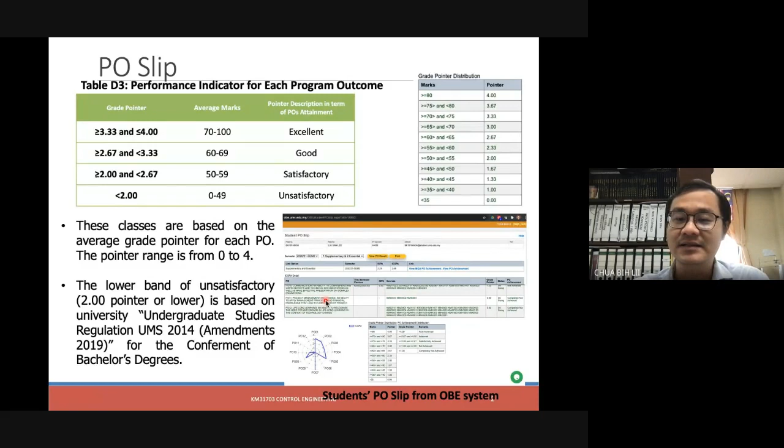Yes, Doctor. All right. Clear, Doctor.

So I think that will end the first part of the needs of the BEM, the EAC, the accreditation process, and why you need to undergo all these things.

These interview sessions, for those selected by the panel, are very important to attend, because they select based on certain criteria. They may choose people from different backgrounds, maybe your entry is from Asasi, Matrix, and so on. So they may want to see what is your entry requirement.

And whether it matches what we put in our handbook or not. If we say for diploma it must be 3.0 and above, so they just interview you and double check. If a student says their diploma is only 2.5 but got admitted, it means something is wrong with the system. So they just want to cross check that what we present to them matches. That's why they interview students, the staff, and everyone along the process.

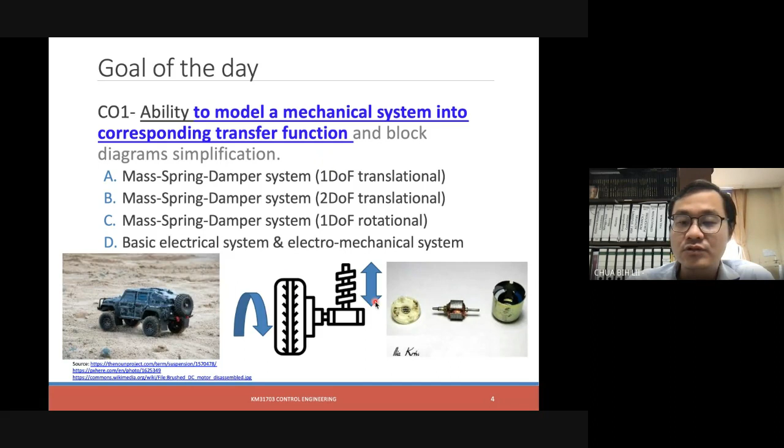So it involves translational and rotationals, right? As you know, we always say modeling. This modeling word can be very wide. I guess from the first years in your study, you have the course called CAD, where you learn how to draw a model inside a software, maybe SolidWorks or any other CAD software. So we call that a model.

That model can be a virtual model. In these courses, what we intend to model is a mathematical model, mathematical equations that represent the effect of that particular system.

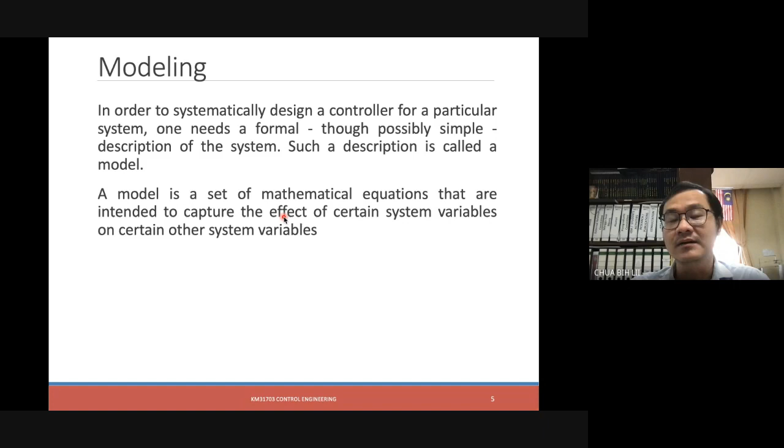That's another kind of modeling. This is what we expect in terms of modeling in control. We try to see a physical model or physical system, and then we try to capture its response, how it will behave, into mathematical equations. We call that a model. Based on that mathematical equations, then from there we can further analyze it, whether the system is stable, not stable, and so on.

I guess later on you will also learn in mechanical vibrations about resonance. You've heard these terms in physics in SPM. So resonance - what is resonance, and how we actually see resonance in so-called mathematical form. From there we try to avoid all this problem so that the system will not become unstable. This is our purpose, of converting the physical model into a mathematical model.

In many cases, we are dealing with non-linear models. However, as an engineer, we always try to simplify. Even though it's non-linear, we try to linearize it, so that the system becomes easier to solve. So our purpose is very direct.

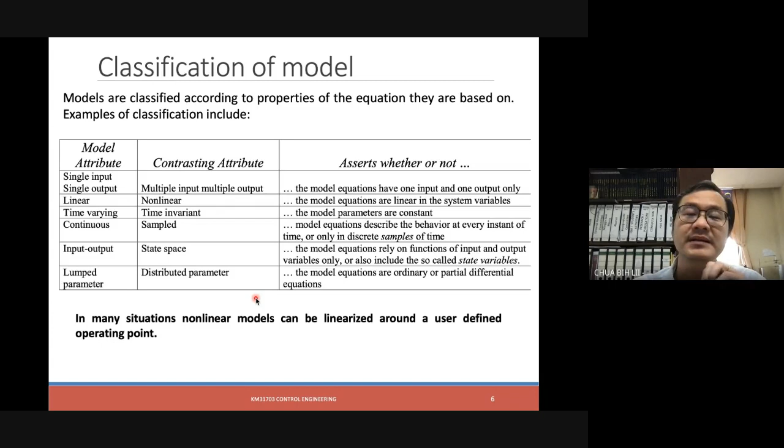As an engineer, we try to see a problem - it can be a very big, complex problem - and we try to simplify it, by breaking it down into smaller parts, into a range of user-defined range. So here is your task as an engineer: to find the balance between the simplicity and the accuracy.

If it is a very complex problem and you just simplify it as simple as possible, then you may lose certain accuracy. So you have to find the balance between them, whether the accuracy is more important or it can be acceptable at a certain level. If you further simplify and the accuracy drops drastically too far away from the real situation, then it may not be suitable.

Actually, if you recall, the formula Newton's second law, F equals to ma, is a simplified version of a mathematical model. The more accurate one, you have to deal with Einstein's equations, gravitational equations, which involve the relativity of two different masses and so on. So that's where the simplicity of F equals to ma is well accepted, in the defined environment, working very well near the surface of the earth.

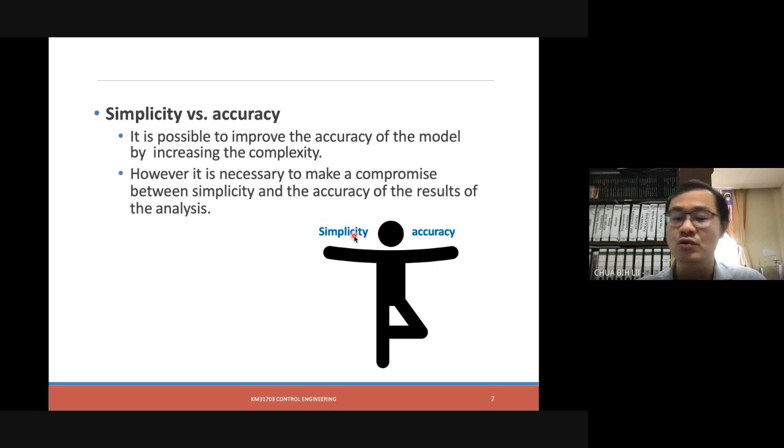Okay, so that it becomes not so-called homogeneous, right? Okay, so this is a general definition in mathematics, right? So I guess this one is not really important for you now, okay?

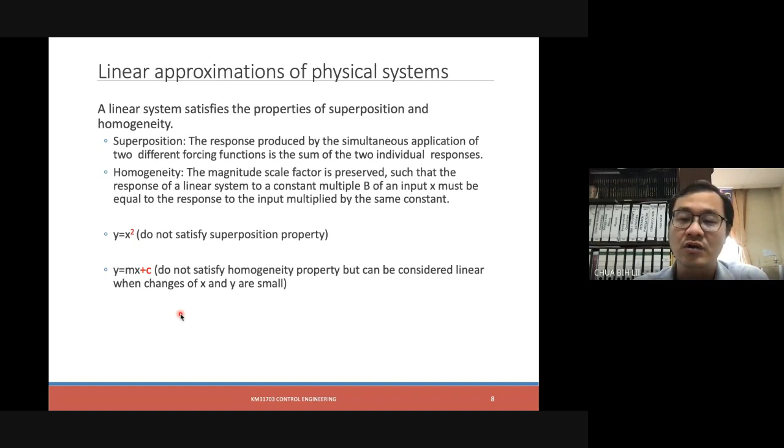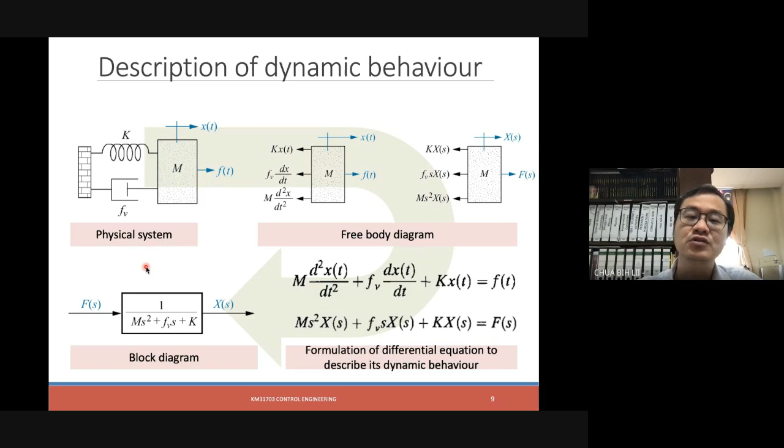So you may have one simplified physical system, or more than that, maybe 10 of them, and how they interact between them, so you can just draw an overall block diagram later on to interconnect them, the effect of all these interconnections, and see what is the response when you put in this input and what would be the expected outcome of the system, right? So this is the idea behind it. It looks very complex, but the fundamentals are very straightforward. All right, so this is our purpose, the exposure or the fundamentals of these courses.

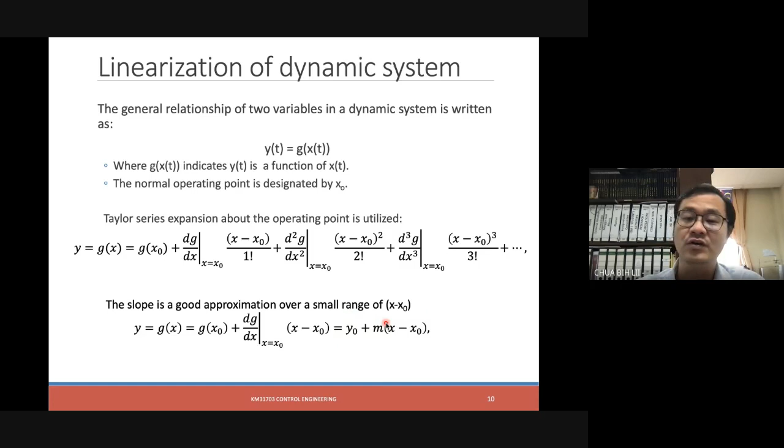So if you see a g and maybe an x over here, right? You eventually form something like this. It's just y equals y naught plus mx, right? So this is a linear equation form, and this is a very good approximation for a small range of x. Okay, so this is how we linearize it.

In other words, in graphical form, you may see that this is the oscillation response, right? It keeps oscillating, but to linearize it, we look at a certain range only. If you define this particular working region, if you only want to know the response of theta within this small range, not more than 90 degrees, let's say 30 degrees to minus 30 degrees, it is very well defined, just like a straight line.

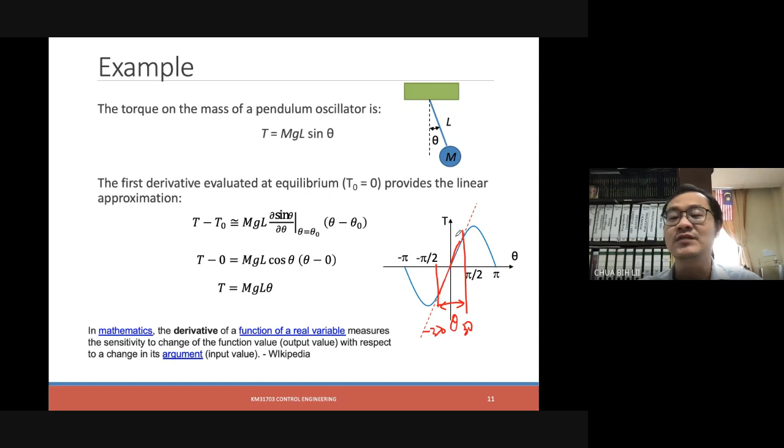Okay, this is how we linearize the system. Instead of a sinusoidal complex response, we linearize it with a straight line. This is the idea behind it, right?

So here is an example captured from the textbook by Nise, I guess. So what you need, you can download it from the mathematical background slides from the Google Classroom, all right? So you just go through it. It's just a refresher of a technique used in differential equations: how to transform it using the Laplace transform.

So you can see that differential equations, you can actually solve them into this, so that you know what y is with respect to time. And how we are going to solve this is through the Laplace transform, one of the methods. I know in differential equations you may learn different methods as well, the so-called conventional methods, which do not use the Laplace transform. But in control engineering, we rely a lot on Laplace transform methods.

So therefore, it is recommended for you to just quickly go through how they turn it into Laplace terms in order to solve it. Just changing the domain from time, because your equation is all about a variable with respect to time, into the Laplace domain, which is the s, the so-called imaginary domain. Once you change into that domain, you can solve it using the Laplace transform formulations, and eventually reconvert back from the s domain into the t domain. That is the idea behind the Laplace transform. Just quickly go through it on your own.

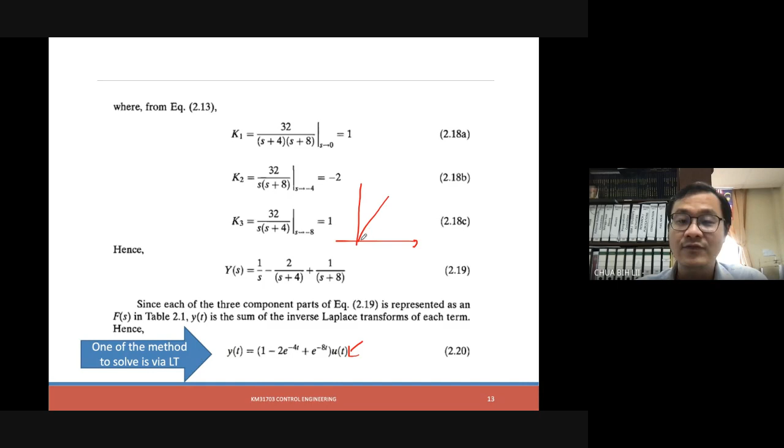But you can see there is a function over here, u(t). Instead of directly multiplying by time, you have a function u(t), such that it is not directly but indirectly related to time, so that y at 1 second refers to 1 second, 2 seconds refers to 2 seconds. Why would we define it this way? Because you have to visualize that this input in real life may not be a straight line; it can be in a form like this.

So at time 1 second, u(t) may be 1; at time 2 seconds, u(t) can be 2, coincidentally; but at time 3 seconds, u(t) may be 4. So it is not directly proportional to time. They are time dependent but not directly a function of time. That is what it means. I hope you get that idea. So in the control system, as we know, we form it in terms of output and input.

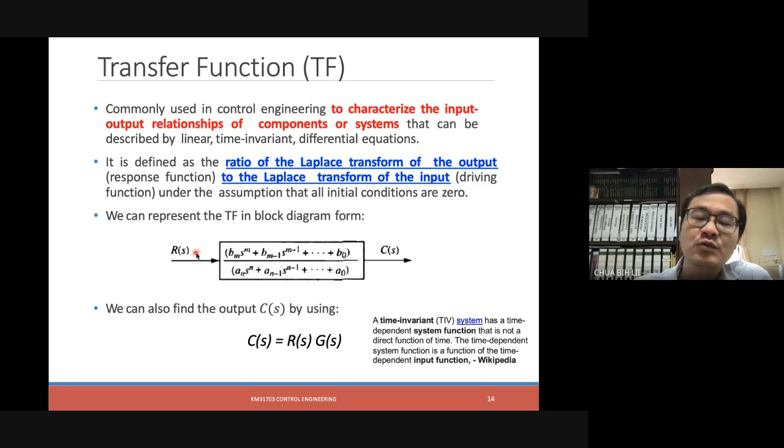In order for us to analyze them, we will start to do some testing later on. All this testing, we would use a conventional or very standard test waveform. So it can be in the form of impulse, we just put a signal of it, impulse, or step, meaning to say it will change and forever be there. One step test input, or ramp, it will continue to change, and parabola and sinusoidal form of input. Why or how are they related with the mechanical system?

Again, if you recall back the spring mass system of a car, or a wheel, let's say a wheel, so you have a spring and a wheel. So eventually, if you form this into a block diagram, or transfer functions, what would happen if this car is driving, and then they come into a pothole? So meaning to say this car now, a pothole like this. So the car will move, and then go down and up.

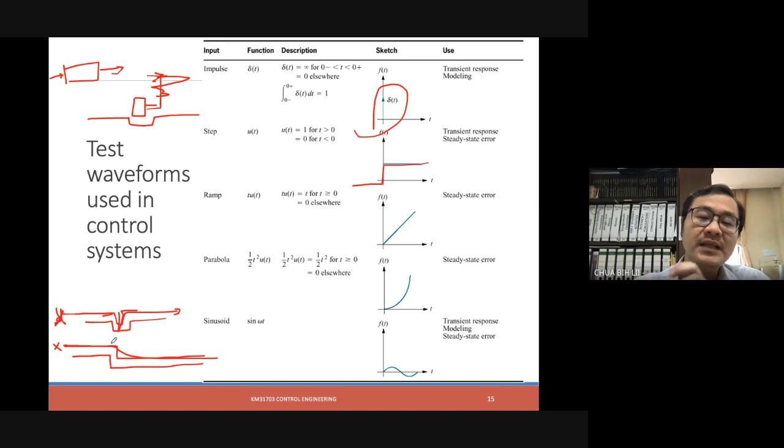So the changes of displacement can be in the form of x. So this form of changes can be represented by the impulse, because it's just one point, change and go back. Then another type of form, related to step, is that if the road is suddenly like this, a stairs, meaning to say you drive a motorbike, then this is an original x position. So you drive your motorbike and then go down the stairs, so it becomes like this, a step, a stairs form. So you will drop like this. So we will use all these forms so that we can see how this spring mass system will react.

Maybe I change a little bit of color first.

What it means is that the system will go into the pothole, being given by this so-called input. But what happens is that this car, after it goes through this, will start to bounce, because you have a spring and the suspension. And this is what we want to see, how it will vibrate, or respond, after going through this type of input. Similarly, originally it can be very stable, but once it goes into a new step, the spring and the mass will start to be compressed, and then it will start to oscillate.

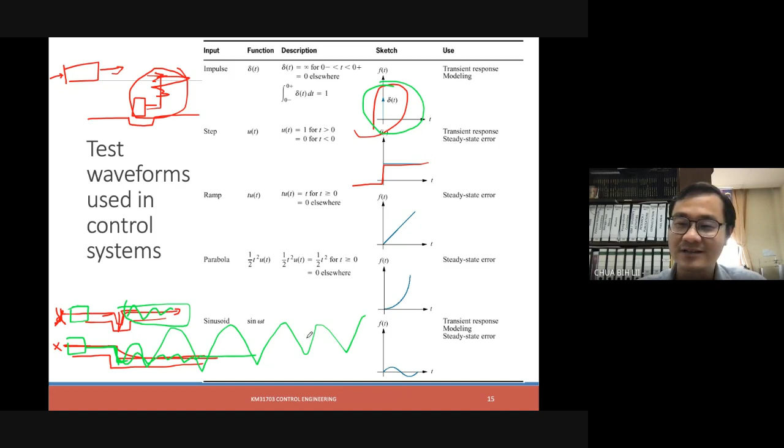So this is where we would like to analyze using the control system and see whether it will get damped or not, being stable later on, or after it goes through, your car becomes more shaky. So this is the purpose of doing all this analysis. And if it doesn't get damped out, meaning to say it becomes unstable, then you will enjoy a roller coaster until your car is broken. So this is the purpose of doing all these things.

So here you can again see that if the transfer function is known, then the output can be studied. If you know the transfer function, you know the relationship of the spring mass or the mechanical system itself, then you can study the output, how it will respond when you do a testing using a certain input. Or in another way, if you do not know the transfer function, meaning to say you cannot model it mechanically, it's like a black box now.

So what you can do is, normally in industry, they will perform experiments. They will do some testing to capture the behavior of the input and the output. Instead of studying the whole system, they just study how it will respond, and capture this into equations, and from there they can continue to simulate under different conditions what will happen.

Here are examples of transfer functions. As I've mentioned, they come from differential equations being converted into the Laplace transform. So here, if you have these differential equations, in the mathematical background slides, or any textbook or online, you can search for the Laplace transform form of maybe KF and so on. So you just need to check term by term.

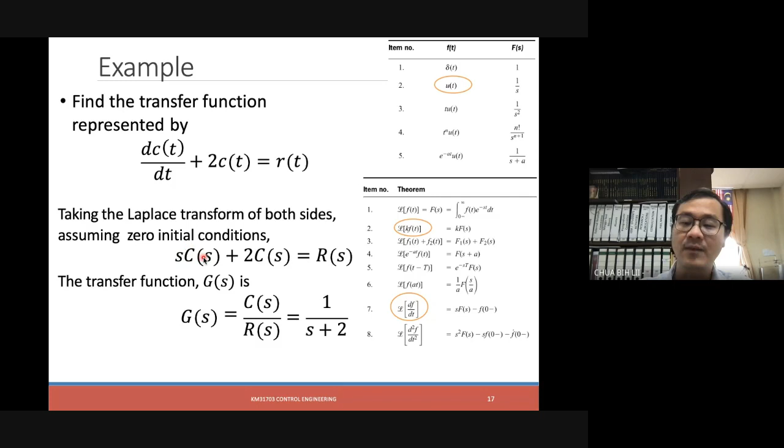So there are two things you may need to pay attention to when you relearn the mathematical background. First is to know how to form this, from differential equations to the Laplace transform. The second one would be to do the partial fractions. Once you can do the partial fractions, then from these terms you recheck from this table and convert back from the Laplace transform to the original. But you must go through the partial fractions in order to do that. So two things you may have to relearn, just to refresh. That would help you in the remainder of this course.

So the idea is that I guess you have seen this before, in differential equations: the spring mass system, one degree of freedom. So during equilibrium, before we start, we form a free body diagram. So imagine that this system is hanging in the air, in the cloud or whatever it is. Cut them off and replace all the cuttings.

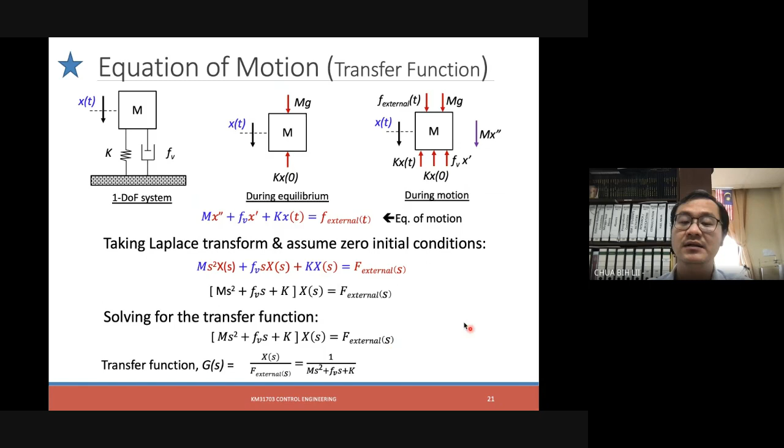So eventually, instead of using the Fx, mg, the force in terms of x, now we use the impedance terms directly. We just sum them up, take the summation of all of this. So eventually you have Ms squared plus K plus fv s, and all this multiplied by X, because the variable is X, equals to the opposite side, the Fs, right? So you form the exact equations like the previous one. So you skip all the hassle of deriving.

So this is another way, but I recommend you go through the first one first, know what is happening, then try the second method, using the impedance method. So from here you should get the same equations. So once you can do it for 1 degree of freedom, now we try second degree of freedom.

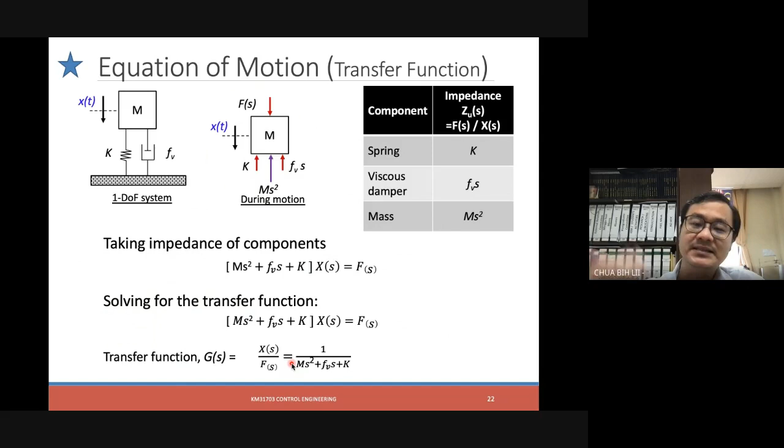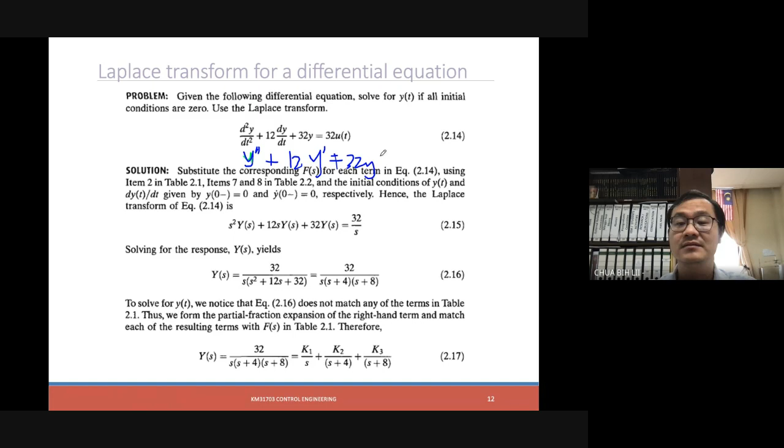Oh, yeah. What is mx double prime? Double prime means second derivative. This is double prime. Abdul Rahman, can you see this? So this basically you can simplify in a form like this, plus 12 differentiations, y prime, sorry, plus 32 y. So this is how you get the double prime, single prime, and so on. So basically, it's a differentiation.

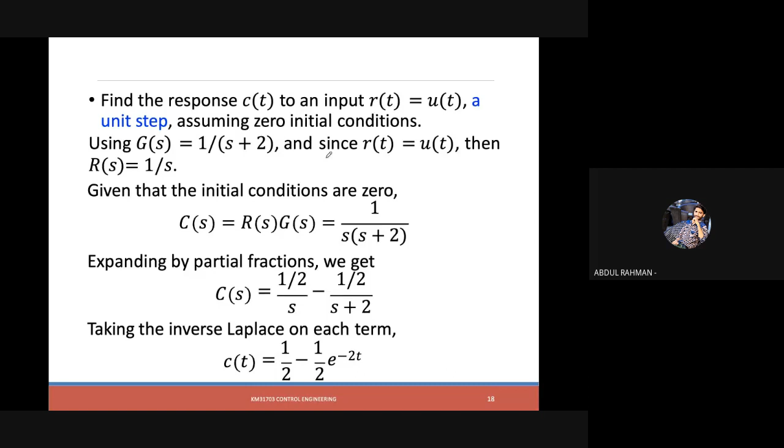Doctor, I want to ask, you go to the degree of freedom one. I want to ask there, double prime. Next, yeah, this one here. If you say this second one is the equilibrium diagram, and the second one during motion means the dynamic diagram. This one is movement. Here I can understand this K force from downward going up and upward force going down. I understand this, but this showing mx prime, what is this representing actually? Mx double, yeah, this one.

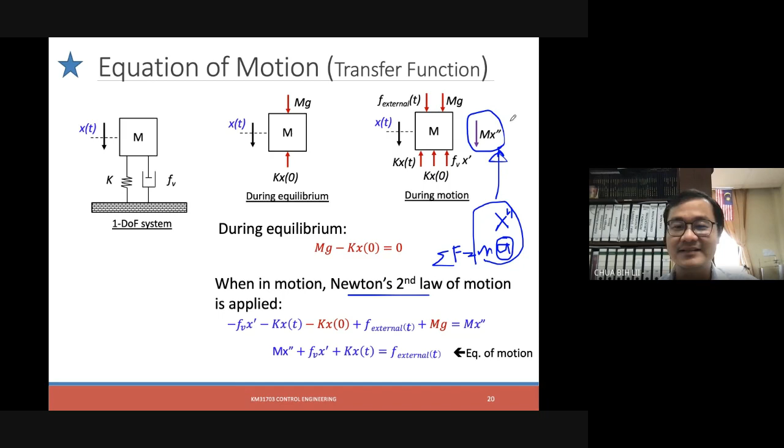Okay, this one. Remember Newton's second law. We say summation of forces equals ma. Right. And a is basically x double prime. Oh, okay. So this term is graphically represented by this, the direction of the acceleration of the mass. All right. Okay, doctor.

Once that is clear, the second degree of freedom is quite similar. What is different is that you have to break them into two free body diagrams. So take one at a time. We start with M1. Once you cut through it, the free body diagram, you have to represent it. Now we are using the impedance method.

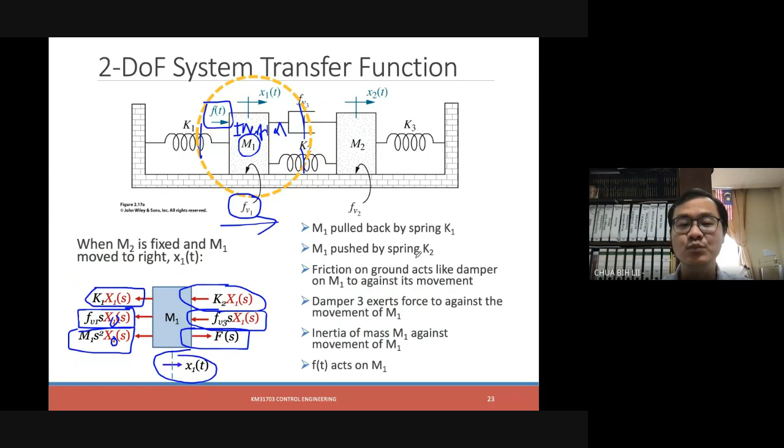So when we consider both of the effects together, when M1 is moving M2 is not moving, and when M2 is moving M1 is not moving, therefore we can combine them together, or we call it superposition. You just bring all this arrow over here, this arrow over here.

Therefore I say the numbering is very important. So this is 2, this is 1. Sorry, this is 2, and the other side is the 1. So when you combine them together, you will see that this is the final superposition free body diagram, with all the impedance. So once you have this, what you need to do is straightforward.

Just total them up together, equals to 0. So totaling up together, F2 is positive. These two things should be positive on one side of the equation, but when you bring it to the other side of the equation, it becomes negative. So you can see minus K2 x2, minus K2 x2, and also minus FV3.

I guess this should be FV3, right? Yeah, I think this should be FV3. You just double check again, probably the numbering has a mistake over here.

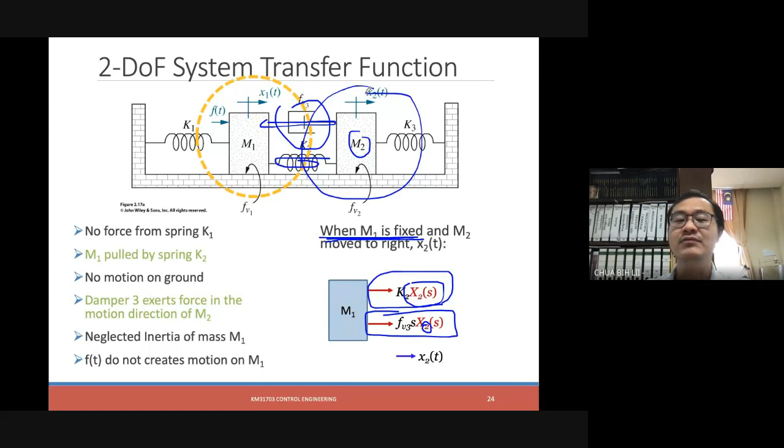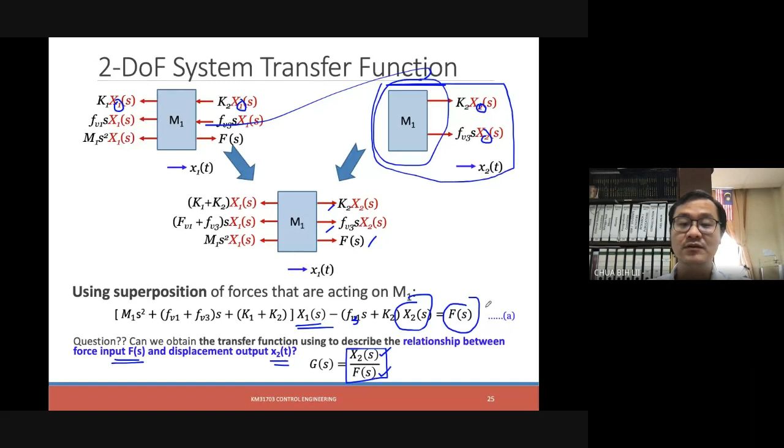Superposition them together, and you would get this impedance diagram, right? So from there, you would have another equation. Now with this first equation and the second equation, is it possible for you to combine them together?

I guess now you can see a clearer one, right? So you have x1, x2, and the output, right? So what you need to do is remove this x1 — you may use equation number 2, okay, equation B. Substitute equation number 2 into equation number 1, over here.

So eventually we arrange, this term will now become a very long term, but in the form of x2. We just substitute into this, all right?

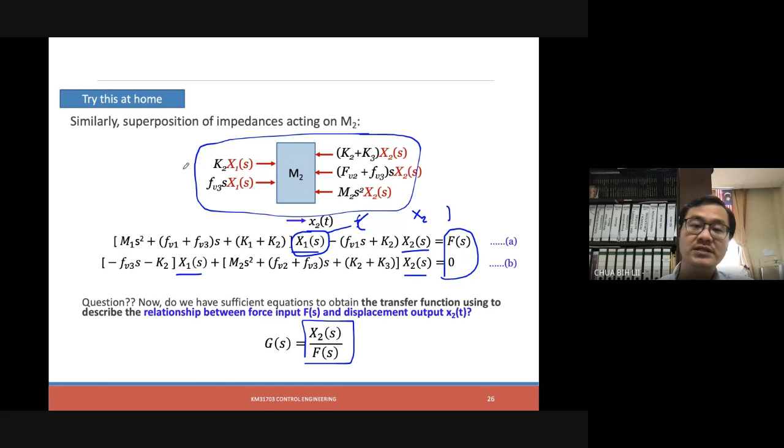So from there, now you have sufficient parameters or information to form this x2 over F. So you just have to try this. I will not go in detail so that you can try.

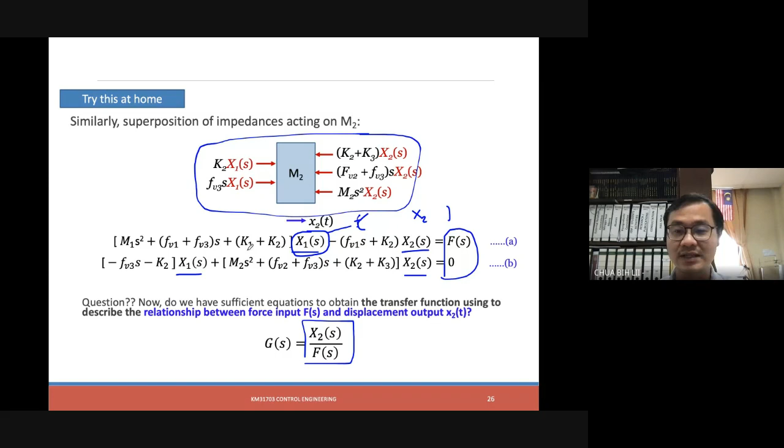So just follow all the steps over here and see whether you get something similar or not. Sometimes my notation is also incorrect because I'm typing all this numbering, sometimes there is a mistake over there. You just check, and eventually you should get the answer, right?

So what you need to do next would be to combine them together, either you substitute or you use another method — we call it Cramer's rule. If you don't like Cramer's rule, you just do as I say: rearrange the equation, substitute it on your own.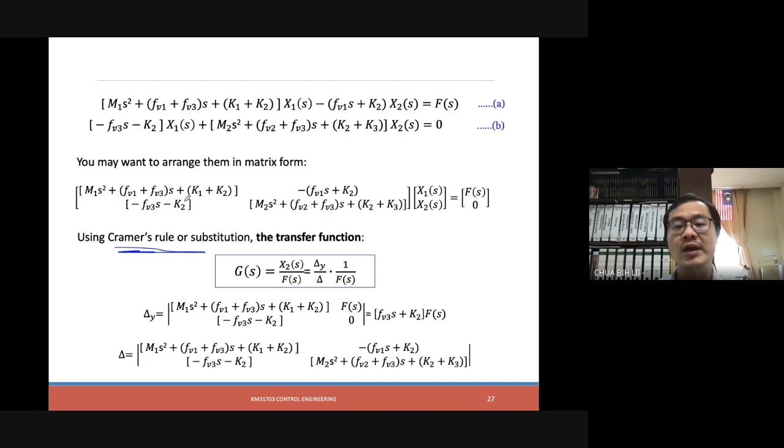If you want to build a program, meaning to make them programmable in the future, then you may need to form a matrix, where the computer can actually calculate based on it, right?

So we call it Cramer's rule, where this Cramer's rule would use this so-called determinant of y, divide by the determinant.

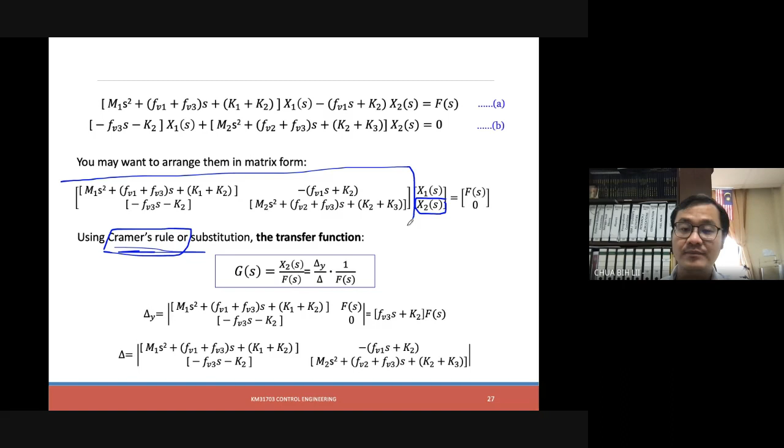What it means by determinant of y over here is that we would like to get the second term, the x2 term, okay. So what we need is to use determinant of y — you look at this matrix related to the y column, which is this column, because this multiplied by x1, this multiplied by x2, right? So related to the x2 column, sorry. Then you just put this over here.

So eventually you form this determinant of y. You can see that this term remains, this term you replace with this. So what you need to do to find the determinant is this multiplied by this minus this multiplied by this, so you get this value.

The determinant of the whole equations would be this multiplied by this, plus or minus this multiplied by this, so you get the answer, right? So you have these two multiplied by this parameter, you form the so-called transfer function that you need.

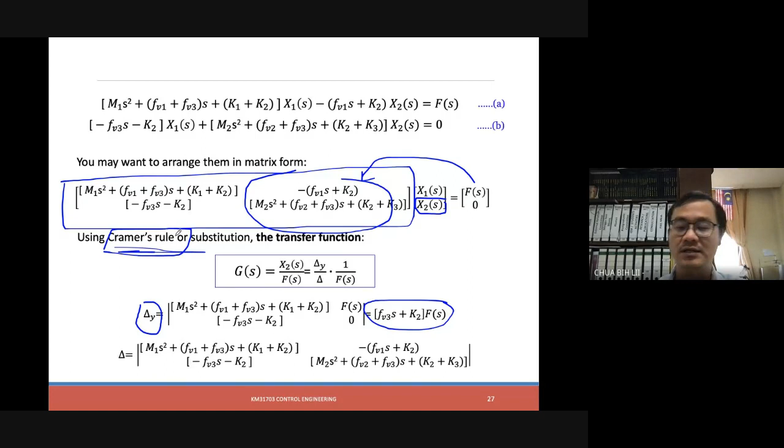It's very tedious, but you can see that the steps are there so that you can eventually program it. The steps are there so that you know the computer will know which one to replace — they don't need human intelligence to identify how to change the equation from left to right and so on to substitute. So this is where Cramer's rule plays an important role in solving equations using matrix form, right?